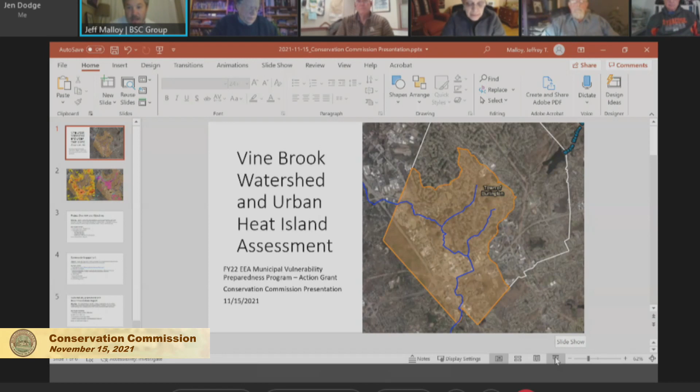So I'm going to quickly share my screen and do a quick presentation here for you, and I'll only spend a couple minutes, so we can ideally move to question and answer, because I think that will be most effective. So this is the project title: Vine Brook Watershed and Urban Heat Island Assessment.

Just to give you some background, how we got here: some of you will recall the town participated just over two years ago in a Municipal Vulnerability Preparedness grant program. The town received funding to go through a 10-month-long process to identify vulnerabilities and strengths within your community. The outcome, a stakeholder-driven community engagement initiative, was a findings report, which included a series of what the state calls actions - projects the town wants to implement. One of the top projects that came out of that process was this Vine Brook Watershed and Urban Heat Island Assessment.

Over the last 6 to 8 months, John and Eileen worked to pull together a grant application, which was subsequently funded for this work. I'm really happy to be working with your community - I was your consultant on the previous planning initiative.

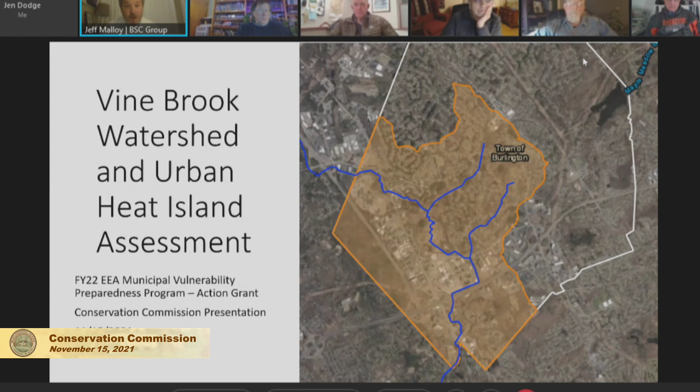So just quickly about project overview and objectives: we want to address urban flood impacts from extreme precipitation and urban heat island effect from these climate exposures, and evaluate this watershed for opportunities to implement nature-based solutions. There are key project activities associated with doing this study.

There's a community engagement piece, and there's the actual vulnerability assessment piece, which involves data collection and analysis. We're looking at lots of different data sources available, both through GIS and other places, to prioritize locations to visit during field data collection. In the next couple weeks we'll do our first field data collection effort - a bunch of BSC eco staff and landscape architects will go to targeted locations and field-truth what they found through the desktop assessment.

We want to develop a prioritization ranking, which can give the community insight into which areas to prioritize first - where's the best bang for your buck. Then there's this RMAT piece, the Resilient Massachusetts Action Team - I can talk more about that in Q&A - this is a tool with an associated regulatory structure being built into the MEPA process and MEPA regulations. These regulations and design guidelines are coming at us really fast, so we want to get out in front of that with prioritized locations and ultimately a recommendations report. Then there's the community engagement piece.

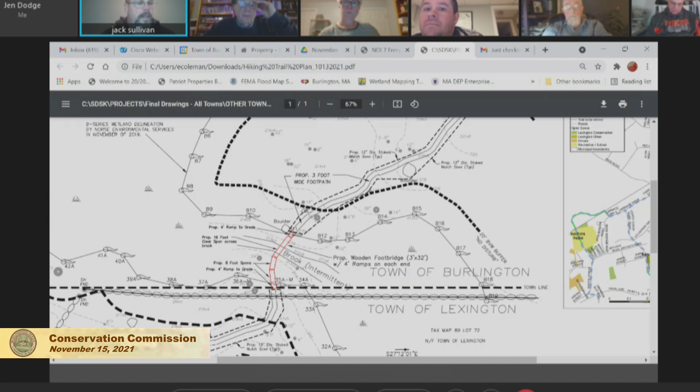All this trail work would be done by a group of volunteers, and it's all handwork. There'd be no machines involved. We did submit with the notice of intent application a schematic of what the footbridge would look like, and there'd be 4-foot ramps on each end. We did receive a DEP file number, but DEP also had comments on how this would be constructed and wanted some additional information.

But you can see how we located the trail system. I located some of the large boulders, trees. Then we actually put flags down showing how the trail would run to minimize any disturbance areas, and I survey located those flags so we'd have a good representation of where this trail would go. Abutters were notified on the Burlington side and Lexington side for this project by certified mailing.

I'll turn it over to the commission to see if they had any questions. I'm sure you did a site walk and might have some questions on this project. All right, thank you for that summary.

Okay, John or Eileen, could you offer us some comments relative to wetland resources, the stream, and other resources?

Months ago, I walked the site with the applicants to look at the crossing and determine that that was indeed the best place to cross, both for topography and for the fact that it was the narrowest wetland section there. So I think this is the right place to do it, and I think this project is fine. I didn't hear Jack answer the questions that DEP raised.

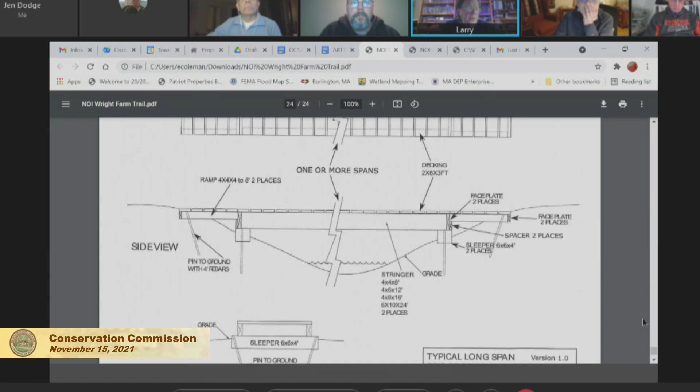So can I just interject here, Larry? So I will need that fairly quickly so that we can get a decision out the door. I can have something to you late this week, John. Okay, that's good. Thanks. All right, Bill, any comments, please?

Yeah, my comment is the trail is 3 feet wide and the overpass is 3 feet wide as well. Is this trail intended for pedestrians only or bicycles as well? And if it is going to be both, is there enough room for a bicycle and a pedestrian to pass on a 3 foot wide trail safely?

Mike, I'll have you field that one. Introduce yourself. I'm Mike Tabazinski, I'm on the Lexington Greenways Corridors Committee, so I guess I officially represent the applicant today. And that's a good question.

In the trail business, we call it a single track trail, which means that it's not comfortable for two people to pass side by side, whether they're walking, on a bike, running, or anything like that. What we rely on is somebody has to step aside at that point, or the cyclist has to move over. We have no intention of building, say, a 6 to 8 foot wide path where it would be easy for people to pass, because that is starting to look much more like a rail trail, which is not what we want.

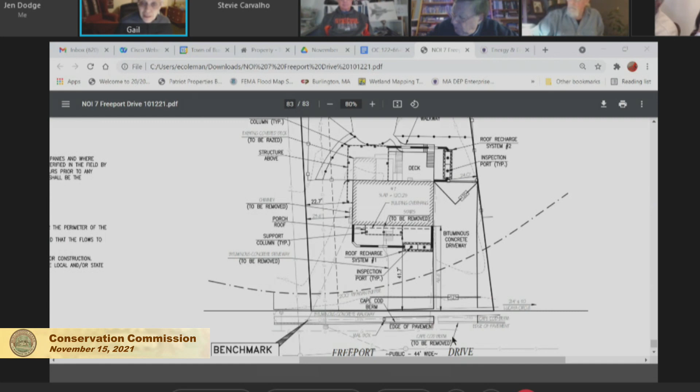So I think we do need - I did read there were pretty limited alternatives there - and we also should have some improvement to how the riverfront is going to be improved. Any work that's done in the riverfront requires that there be improvement done. So I'd like to see something about that. And then I think those other questions that the DEP brought up will have to be responded to as well.

I mean, with respect to the riverfront and how it's being improved - we're adding all of this flood storage, which wasn't there initially, just by adding the flood vents.

Well, I think it would be nice to see some... I mean, that helps in terms of flood storage and the floodplain, but I think the quality of the riverfront itself could have some benefit there, especially if there's mowing being done on the other side of the fence - that area could either be left to be naturally vegetated, or maybe a few blueberry bushes or something could be planted back there. That would be an improvement. I mean, we could add a note that the area behind the fence be left to remain undisturbed.

And John, I just have a question - so the shed and the other stuff that's in the backyard, were those things permitted?

Were they existing when this last came up? I'm not sure, I'd have to look. I can answer that - when our previous plans were prepared, the notice of intent several years ago, those sheds, the pool, concrete, all of that work was already there. When it was constructed, I don't have the answer to. Perhaps the well, that's for the applicant. Okay, that's all right, thank you.

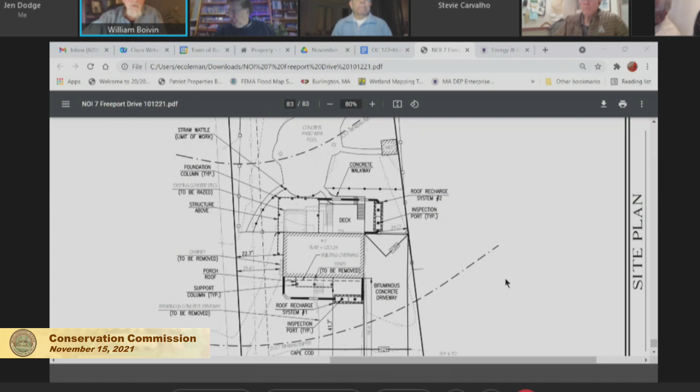I agree, and I'm glad John confirmed that the increase in flood storage, which is good, is not technically a riverfront improvement. The driveway, the new driveway, if I'm reading the grades correctly - and I'd like you to confirm it - runoff will flow to the rear, back onto the property?

It flows towards the rear. Okay, and we could provide some sort of stone diaphragm trench at that edge of pavement to avoid water going much further than the edge of pavement on the east side of the property, which would be the rear of the house, and try to recharge it back into the ground. We'd be more than willing to provide some sort of infiltration capacity in the pavement there.

Well, that would be up to you. I don't think we would require that if it's not flowing off the property, so as long as the water is staying on the property, you can control it in whatever manner you would so desire.

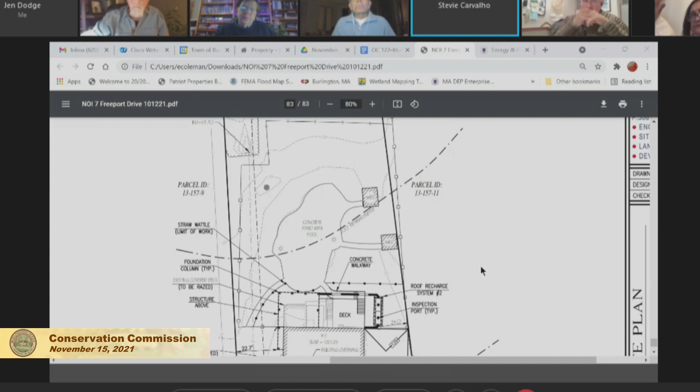I'm a little surprised to see a significant size pool with a concrete patio in the inner riparian zone. You don't have any idea when that was constructed or whether it was permitted? No, I don't, and like I said, the applicants should be on - I don't know if they want to let us know whether or not it was there when they purchased the house, or when it was installed, if they have any information on that.

It's not something that, if it was there when they bought the house, then it's not their responsibility, I guess. I'm just curious how that came to be, because it's not something I think we would approve.

Good evening, my name is James Rissling, I'm the architect. The Javeris have lived in the house for over 35 years. I believe the pool was a very early addition to the house, back some time ago, so that's a feature they've enjoyed for a very long time. I'm sharing an aerial from the 90s and the pool is there. It is there, okay.

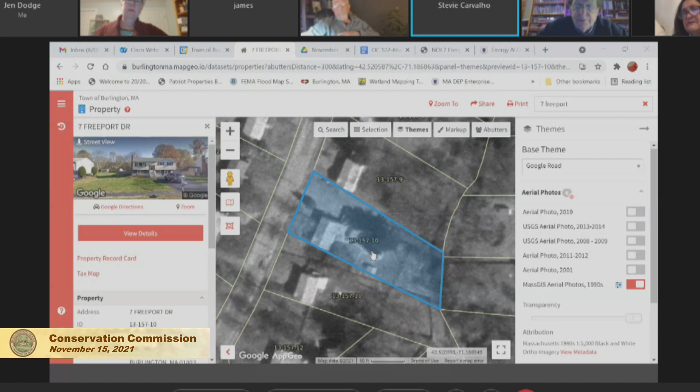All right, Bill, did I go to you? You have anything? Yes, that was me speaking, so I'm all set. All right, Jennifer? I don't have anything more to add. Thank you. Ed? I agree that it's pretty well covered, you guys did a good job going over everything. Kent? Nothing to add, I agree with what Ed said. John, I have a question.

You said a couple of years ago, did we actually approve an order of conditions? Is that correct? It was more than a couple of years ago, it was not '19, it was 2015. So that expired.

And you issued a certificate of compliance at the last meeting, I think, to clear that up. Right, they didn't do any work. Is that correct? Correct. But as part of that condition, these people were aware of the desire to let the area behind the fence revegetate back in 2015. Is that correct? Right, that was a condition then. Yes, and they did not comply with that. Okay, well, they didn't do anything in the order. Right, they didn't do the project. It was never even recorded.

There was no pre-construction meeting. Yeah, I guess they weren't officially obligated to honor that part of the order. All right, well, it's too bad, it would have been to the benefit of the riverfront to have seen it revegetated today.

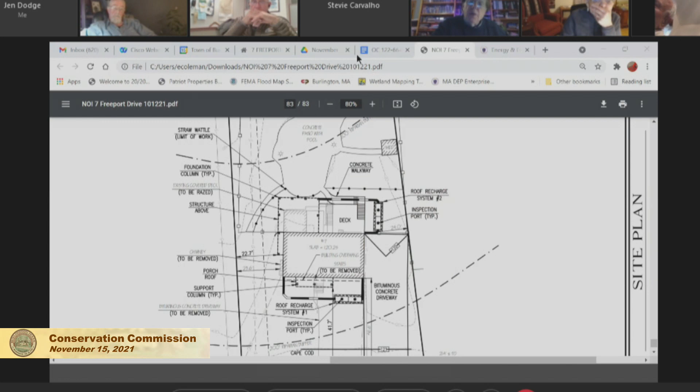Thank you. Bill, do we need any more? You brought up the question about how the impervious area before and in the proposed condition is calculated. Do we need a comparison table with a couple of columns with some detail in it, so we know exactly how it was done? Are you satisfied, do you understand?

Well, I guess the calculations he talked about, do they need to be modified with a different number for the square footage of impervious area now? No, because when I did my analysis, I took existing conditions and based it on total site impervious area. When I did my proposed analysis with these two roof recharge systems, I included those overhangs, all the portions of the building.

Even the overhang of the building, the porch, everything up on piles, as impervious area. I did that because I was under the impression the applicant was looking to put some sort of patio or concrete patio underneath those areas. As far as a table, I provided that in the notice of intent. We provided all of the HydroCAD analysis to show pre versus post, a summary of total site runoff for both pre and post conditions.

So your calculations are conservative. That's good, thank you, I did see that. I was referring only to the calculation of before and after impervious surface. We could certainly include just that, but it's in the HydroCAD report, the stormwater calculations itself. If the commission would like to see pre versus post, call that. If you feel we need something more on it, fine, if not, we're all set.

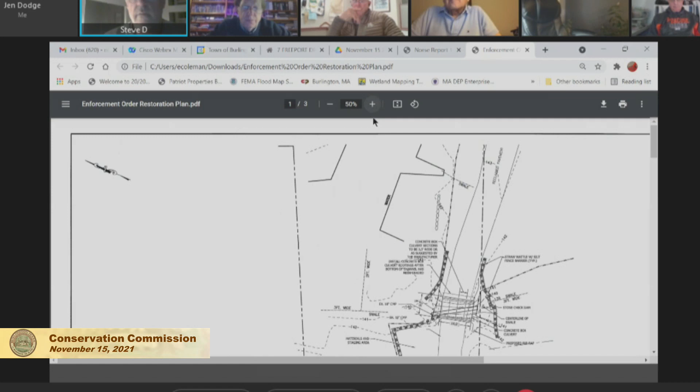We've submitted that. What we're trying to do is put in erosion control, dig out the culvert, and replace it with a box culvert under the enforcement order, to be followed up quickly with a notice of intent to do all that. We'd like to be able to get that water flowing.

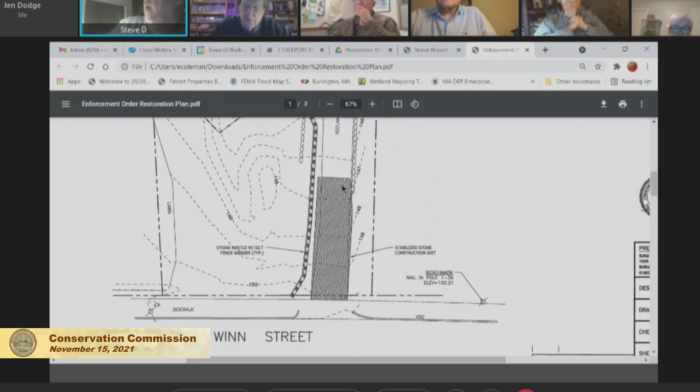Maureen has a restoration plan, and I've submitted some preliminary plans just for the culvert. Basically the process would be: putting in additional erosion controls, installing a temporary stone exit at the beginning for vehicles going in and out so they don't put dirt onto Winn Street, dewatering if necessary, which will more than likely be needed, removing and scraping off the reclaimed pavement in that area, disposing of it properly, excavating down to the pipe, carefully taking out that pipe, and then grading the bottom of the channel appropriately.

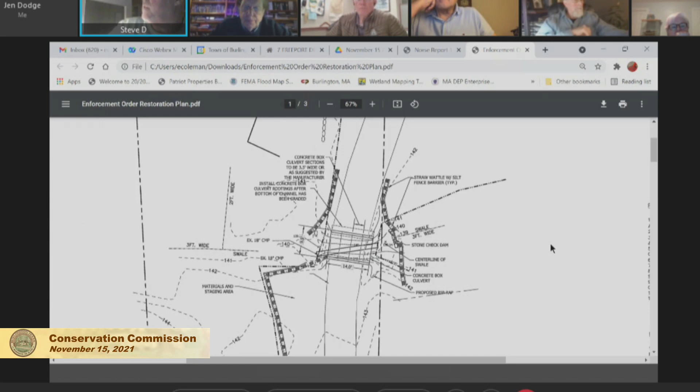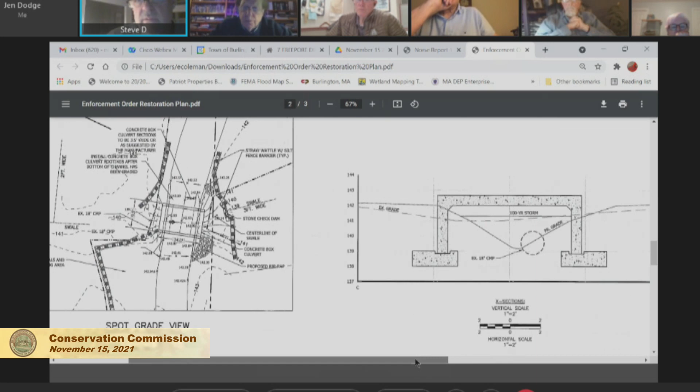We need to match basically what the stream bed is like per the Massachusetts stream crossing regulations. Then we would put in a footing on each side, and it's an 8-foot box culvert. We came to 8 feet because of the Mass stream crossing standards — you have to be at least 1.2 times wider than the top of the stream. It's 6 feet wide at the stream bank, so we came up with 8 feet. That allows us to meet what they call an openness ratio, basically the area of the opening divided by the length of the crossing. We meet that, so the size of the box culvert is dictated by the Mass stream crossing standard.

So we put in those footings, dig it out, and drop the box culvert. It'll be craned in once the footings are in, dropped in place and sealed together with a butyl sealant, then backfilled and ready to go.

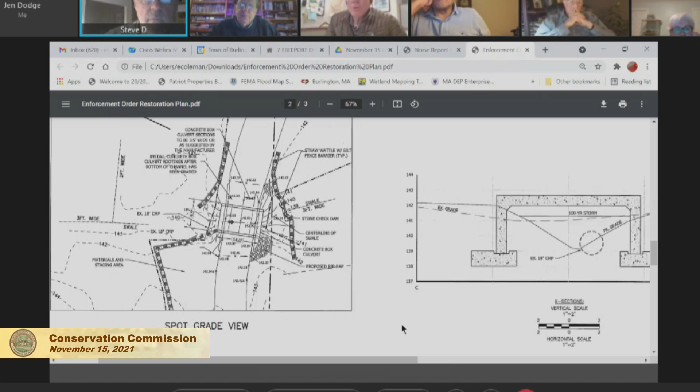So the enforcement order wording states: the applicant may immediately commence dewatering the site to assess the culvert, and may install a new concrete box culvert upon ratification of this order by the Conservation Commission on November 15th. The applicant shall file a notice of intent for retroactive approval of the culvert and for stream and wetland restoration for the Commission's December 9th meeting. So you'd be voting on giving them permission to proceed with the box culvert, while filing a notice of intent for your next meeting, even though the culvert could well be in place by then. It's a time of year issue, and the site is a mess out there. So it's your call.

Okay, anything further, Mr. Dresser, before we move on? No, I don't know if Maureen wants to let you know what her intent would be at this time with the plantings and stabilization.

Could you guys clarify for the commission, assuming you get the culvert in under this enforcement order, how much work is left after that point? Is it mostly stabilization and planting? Yes. But for this particular part, there's an active notice on this as well for putting the sewer underneath the stream.